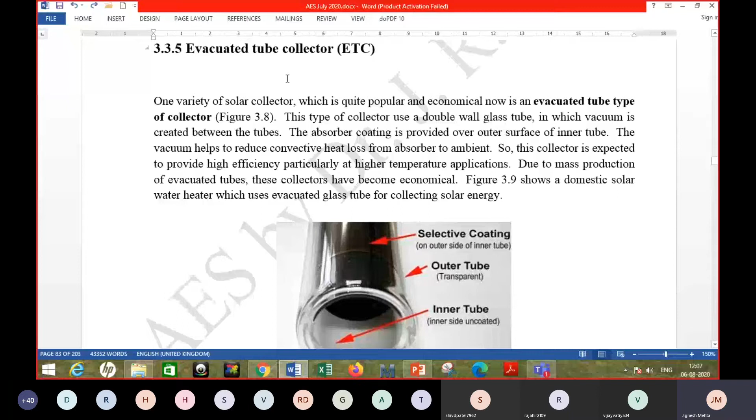The other type of stationary or non-tracking collector mentioned was the evacuated tube collector. Recently this technology has been accepted to a wide extent. One of the reasons given is that it has high efficiency, but the other reason is that the cost is very low because of the mass production of this component, the tube which collects solar energy.

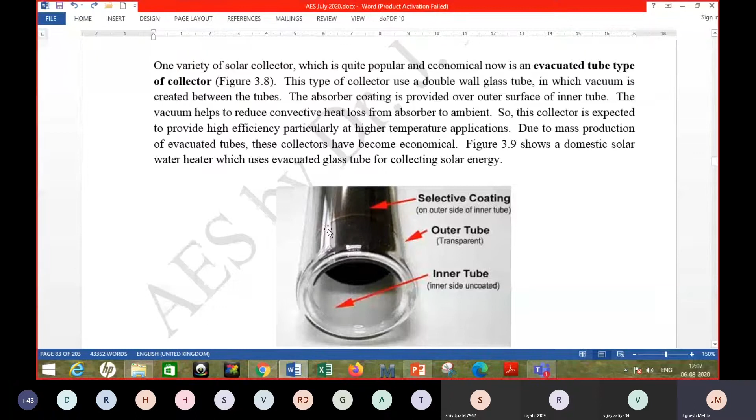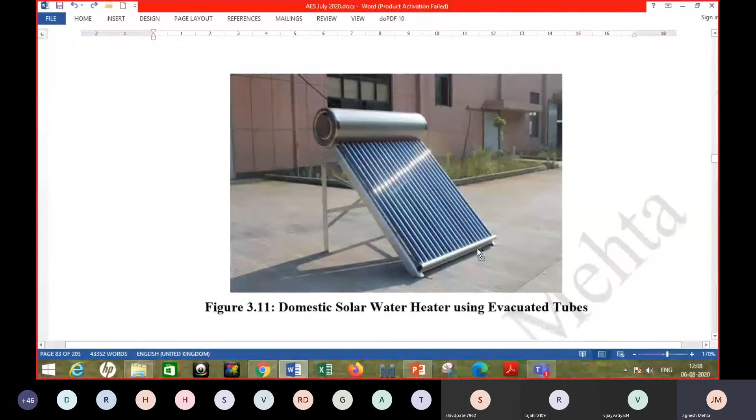Before giving you details about this tube, let me show you something you might have seen. This is another type of domestic solar water heater, which many of you would have seen over terraces of many buildings or houses. One is the flat plate collector, and the other is this one having multiple tubes like this.

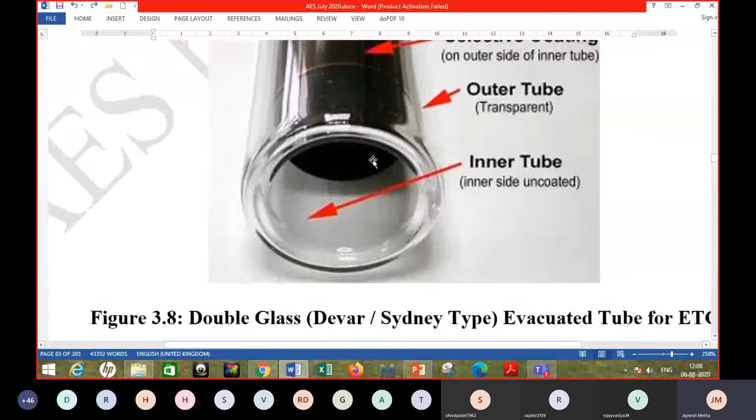So what are these tubes? Individually, though this isn't showing the full picture, it's only showing the mouth portion, which will fit here in the tank. There will be a gasket here so that the water doesn't leak from the joint. That mouth portion is inserted into the water tank, and because of the gasket used at the joint, there won't be any water leakage.

There will be water filled in this tank, which is an SS tank as can be seen here, and there would be insulation, so the heat loss from the heated water would be less. This tube is hollow from inside, and could be somewhere around 1.5 meters long.

This is actually not a single tube. As you can see, there are two tubes, this inner tube and the outer tube. So two concentric tubes are there, with a gap between them, just 2-3 millimeters or so. That gap doesn't have regular atmospheric air at that pressure - it is highly vacuumized. In other words, it is evacuated, and that's why the name evacuated tube collector.

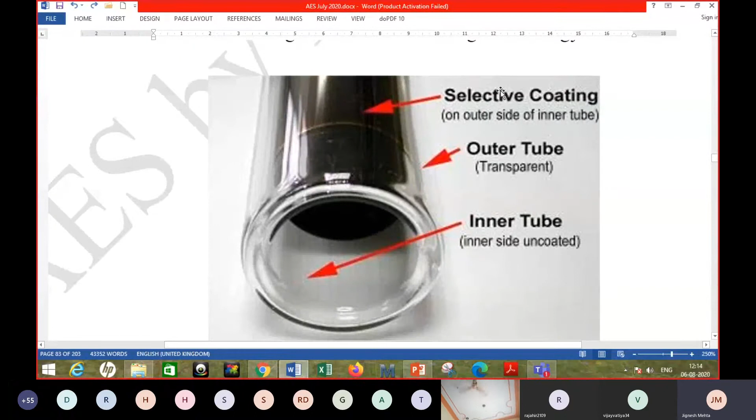But if you operate it at a very high temperature, you can expect that the efficiency could be higher than the efficiency of a flat plate collector. But of course, finally it depends all on the quality of the components used. If the quality of the coating is not very good, its absorptivity itself is not very good, then you cannot expect it will give you higher efficiency.

So another variety, as explained, is the evacuated tube collector.

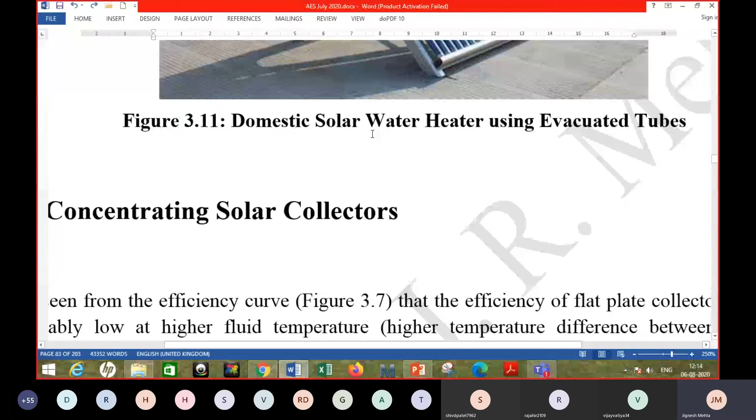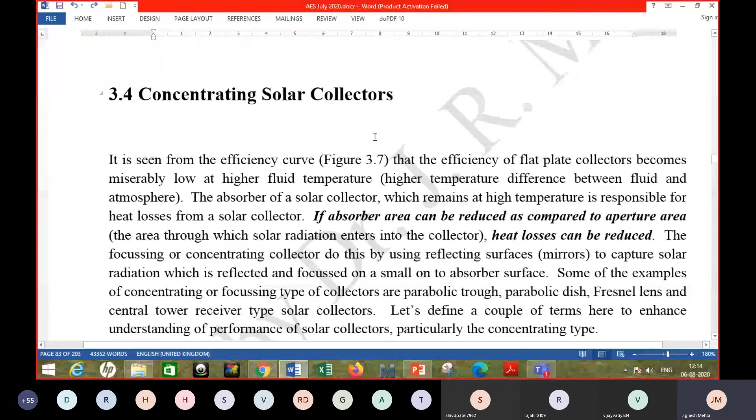Now we are starting to talk about the concentrating type of collector. First question is, why should one use a concentrating type of collector? I can give you some reasons, or disadvantages, or limitations. One, they have to track the sun, almost all of them, except maybe some exceptions. They need a tracking mechanism which has additional cost and maintenance related with that. Again, tracking cannot be perfect most of the times.

So there'll be loss because of that. And when you say concentrating, it means reflection or refraction is involved. So reflection and refraction would have their own inaccuracies, and because of that there could be losses. Also, concentrating collectors can use only beam radiation. They cannot focus diffuse radiation, since diffuse radiation is coming from all directions, so it's not possible to focus them on a small area.

So, but then why do people go for a concentrating type of collector for some applications? The reason is that if you want to produce higher temperatures and you don't want efficiency to go down drastically, then you would go for a concentrating type of collector.

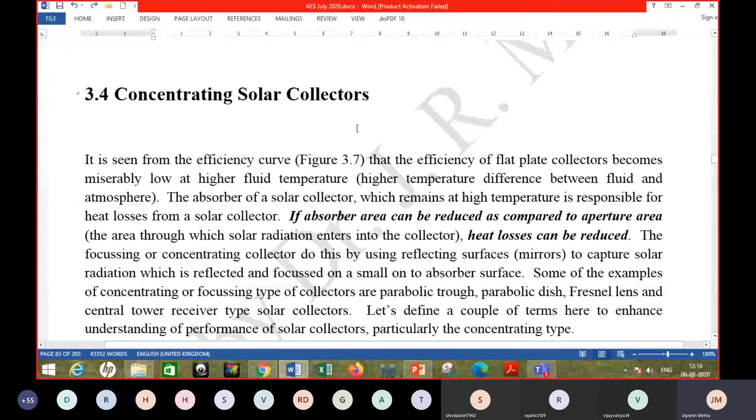So I would show you that efficiency curve again, which is a very important curve. You need to understand that thoroughly. What does it explain? This is delta T. I hope by now you know what delta T is. Delta T is the temperature difference between the inlet fluid temperature and the ambient temperature. Sometimes, as I told, it is taken as the mean temperature of the fluid minus ambient temperature. So basically, it represents the operating temperature.

If you want to produce higher temperatures, different applications need different temperatures, right? For example, water heating, the temperature required is not very high, could be around 60 degrees or so. If you talk about swimming pool application, it will be even lower than that. Other applications, for example producing steam, would need a higher temperature, or process heating applications in different industries, or even refrigeration and air conditioning—you would need higher temperatures. So in that case, your delta T would be higher.

So higher delta T means, for a given collector—let's say this is for a flat plate collector, the simple flat plate collector used for water heating. Now let's say somebody needs water at 50 degrees Celsius. In that case your efficiency value may come out to be, let's say, 70%. But somebody else needs water at 60 degrees Celsius. So in that case your efficiency may come out to be 55%.

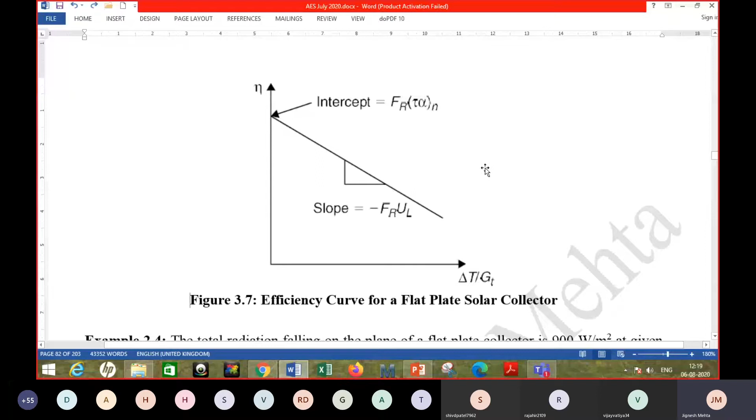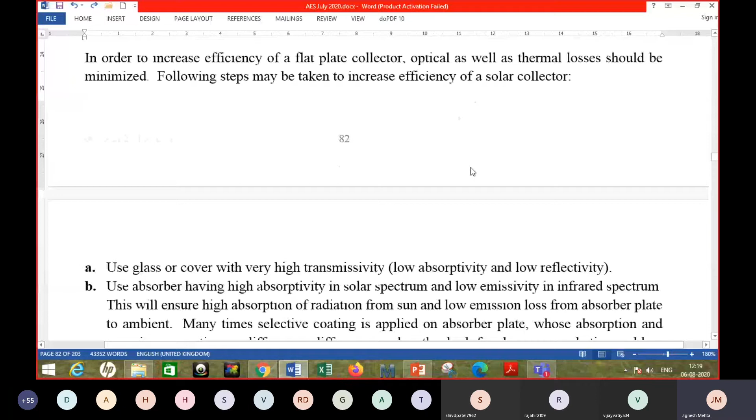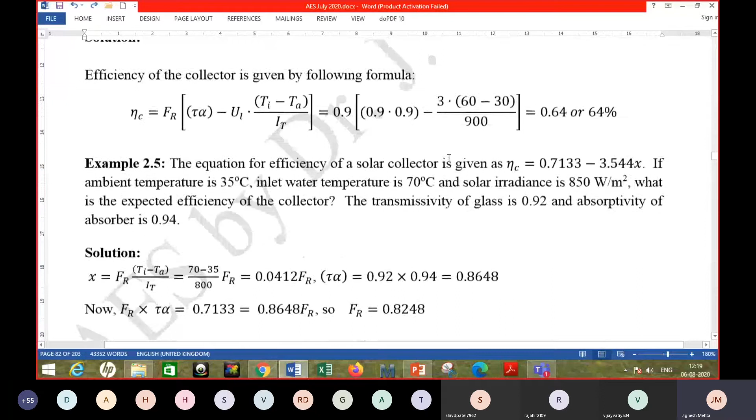So you would rather like to go for some collector which can give you a bit different type of graph, not like this, but having less slope as compared to that. But then sometimes the starting point, this intercept, may be lower, but the slope of the line may be less, and because of that it may be more suitable for higher delta T. So this is the basic concept of why a higher quality solar collector or concentrating type of solar collector may be used. Now, why would the efficiency not reduce drastically with higher temperature in another type of collector? Let me show the graph, I'll explain it there.

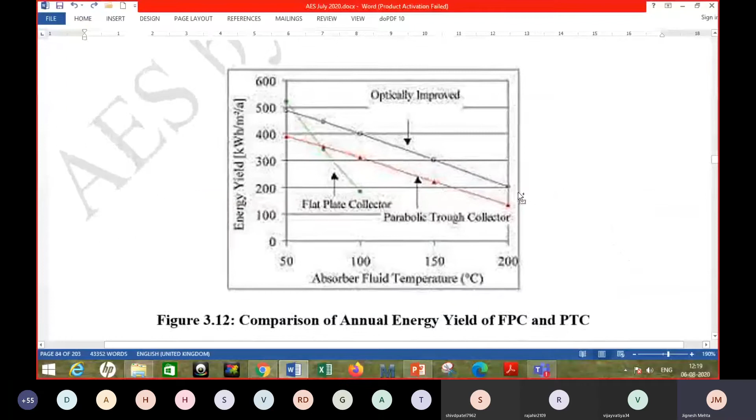Okay, so you have this option. Let's say this flat plate collector. The diagram is not very sharp, but I hope you are able to understand. This line you see here is for flat plate collector. So what does it mean? If you want to go for high operating temperatures, it can give you very low efficiency. It's not exactly efficiency which is put here, but it finally indirectly comes from efficiency. This is energy yield in kilowatt hour per meter square per annum, so the data for the whole year is taken for a flat plate collector.

Of course, how is this line created? It is created with the help of 3 different points. You tested it at 3 different points throughout the year, and from that you are able to generate this data. Now, if you talk about another type of collector, which is a concentrating collector, the parabolic trough type of collector, you might or might not have come across this. That will be explained in this lecture. What is a parabolic trough type of collector?

You can see that the line, the intercept is lower. It means that if you want to use it for very low temperature applications, it is actually not suitable. It's better to go for the flat plate type of collector as compared to the parabolic trough type of collector, which is a concentrating type of collector.

The reasons for this lower efficiency at lower temperatures could be the additional losses in terms of when a reflector is used, so reflectivity won't be 100%. Because of that, the optical loss, which I had talked about in the previous class, could be higher. So that would reduce this intercept.

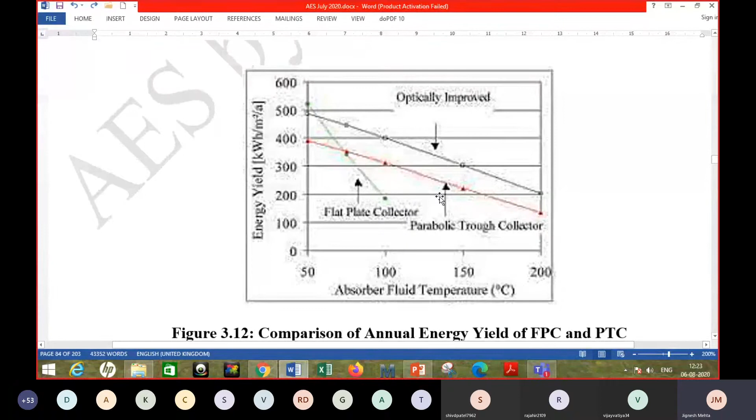Now, what is the reason for that? The reason is, in case of flat plate collector, the aperture area - what is aperture area? It is the area through which the solar radiation enters a collector. Aperture area is almost equal to the absorber area because it is a flat plate type of collector. So that plate area is the absorber area, which is almost the same as the aperture area.

If you consider the glass area equal to aperture area, that plate area is almost equal to the glass area. So absorber area and aperture area are almost the same. Now, what is the problem with high absorber area? The problem is that higher the area, higher the heat transfer rate. Now you know the equation, the heat loss QL is proportionate to the U value, the heat loss coefficient, into area of the collector or rather the absorber, into delta T. So higher the area, higher the loss.

Now, can you keep aperture area the same and reduce absorber area? Yes, that is possible. In case of flat plate collector, the ratio is almost equal to 1. But what you want is to keep your aperture area the same, or higher, and reduce the absorber area. So basically what you want to do is increase the aperture area to absorber area ratio, because absorber area is responsible for heat loss.

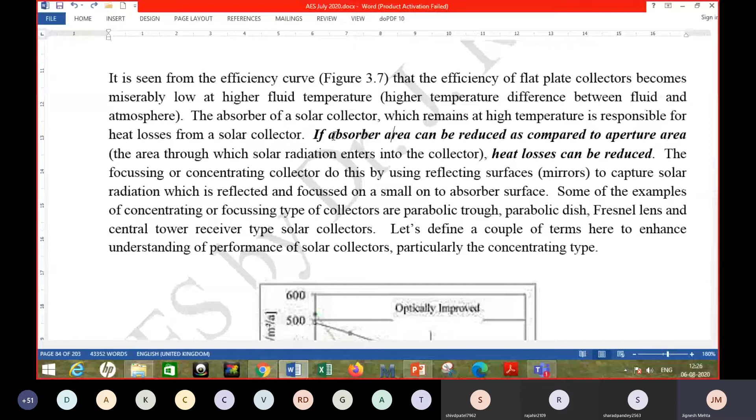The ratio of the aperture area to absorber area is called concentration ratio. If you have a higher concentration ratio, you can expect the heat loss to reduce. Remember, we are not talking about optical losses. Optical losses could actually be higher in a concentrating type of collector, because you're adding more components like reflection or refraction, and geometrical error may be there. So you might be increasing the optical error, but the thermal heat loss would certainly get reduced, because the area through which thermal heat loss occurs can be reduced compared to the aperture area.

So at higher temperatures, it would generally be advantageous to use a concentrating type of collector. Now there is one term, I already defined concentration ratio. There is one term called stagnation temperature.

Now what is that? You have three points for the flat plate collector. I can have even more points, go on increasing the absorber fluid temperature, or just extend this graph assuming it gives a linear curve. So you might find that somewhere near, let's say 140 or 135, this touches the horizontal axis. What does it mean? It won't give you any energy, or efficiency would be equal to zero.

So what does it mean? The absorber fluid temperature is 135. So what does it mean? It will give no output if you try to get heat at 135°C. Why would that happen? It would happen because the absorber surface is so heated, it is at such a high temperature that the heat loss equals whatever gain there is from solar radiation conversion.

The gain is lost to the atmosphere because the temperature is so high, and you are not able to heat the fluid at all. It just remains, you are pumping it in at 135, it comes out at 135. That's all. You are not able to get any productive output from that collector.

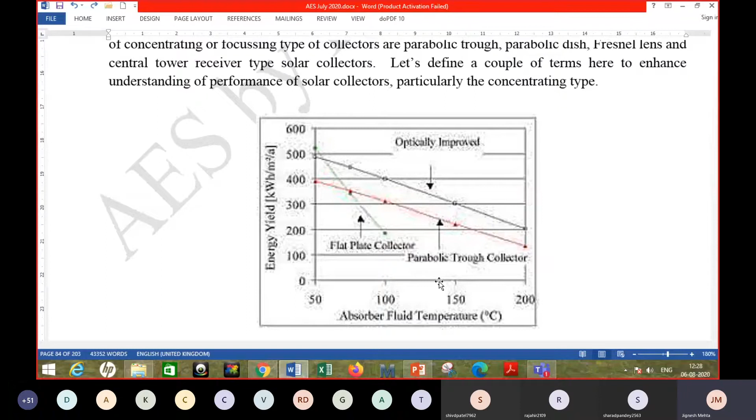Now this temperature is called stagnation temperature. Higher the concentration ratio, higher the stagnation temperature. As you can see, for a parabolic trough type collector, it is much more than 200°C. So even up to 200, let's say it touches 250. So if your fluid temperature is below that it will certainly give some output, but at 250 it will not give you any output.

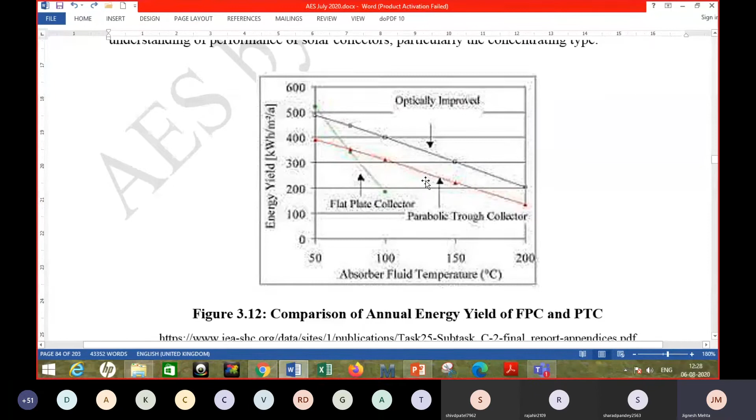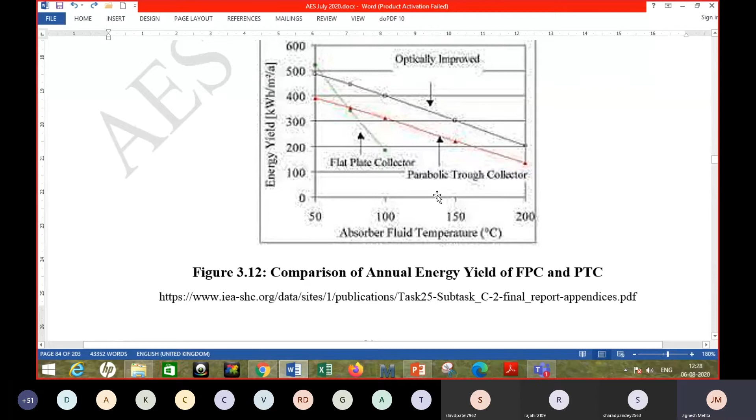This stagnation temperature is important because in case the collector is lying idle, it should still be able to withstand that temperature, the stagnation temperature. Because there could be times when you are not using the collector for some reason, and the collector will reach a very high temperature equal to the stagnation temperature. So your collector design should be such that it is able to withstand the stagnation temperature. Okay, so that is about the stagnation temperature.

Concentration ratio is the ratio of aperture area to absorber area in case of a concentrating collector. So what is a concentrating or focusing type of collector? It will have some area which reflects or refracts solar radiation and focuses it on a smaller absorber area. All those types of collectors are concentrating type collectors.

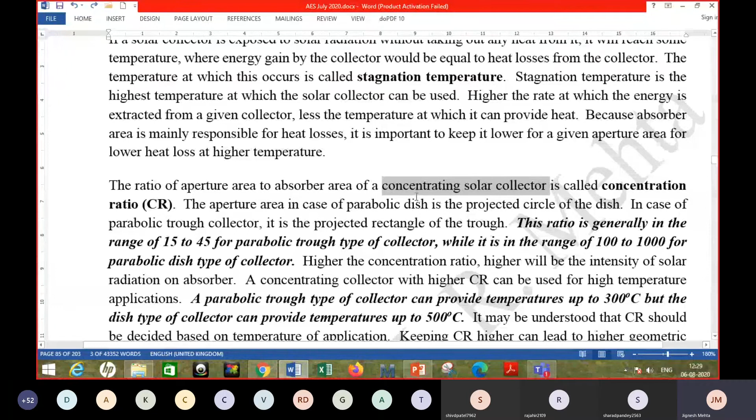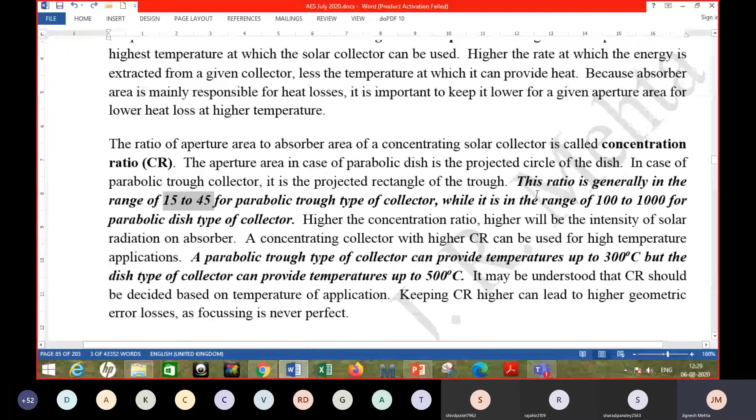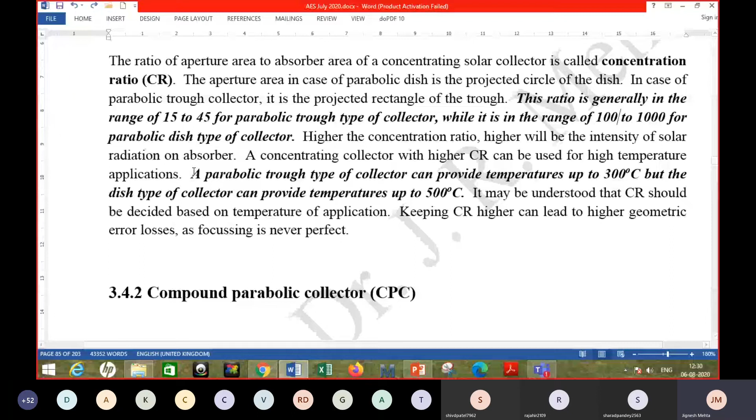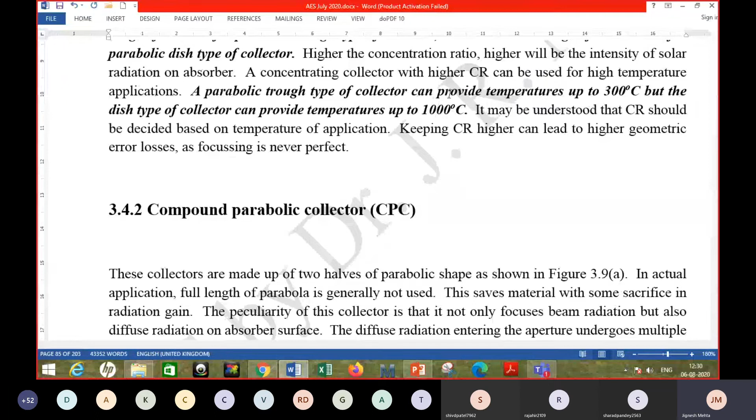There is a parabolic trough type collector which has this concentration ratio, CR, generally in the range of 15 to 45. But there are other designs like the parabolic dish type collector, which has a concentration ratio in the range of 100 to 1000. Generally, higher the temperature you want, higher the concentration ratio you keep, because you want to reduce the absorber area compared to the aperture area to reduce thermal losses. A parabolic trough type collector can provide temperatures up to 300, but a dish type collector can go up to 1000°C.

Let's talk about one type of collector called the compound parabolic collector, which has become more popular, or is recommended for applications where the required temperatures are not very high, somewhere around 120 to 150°C. This is actually a concentrating type of collector, but the concentration ratio is small, generally less than 3. It is said to be a non-imaging type of collector, which is one of the advantages stated for this type of collector.

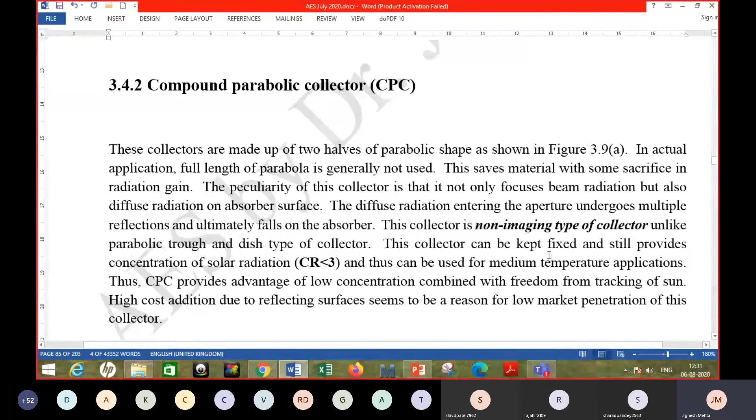So I'll show you the figure of this collector. It's generally for medium temperature applications, not very high temperature application. So theoretically, it is made like this.

So you have one parabola A here, this dashed line, but this portion is shown as full line. There is one parabola here, A, and another parabola here, B, and again some portion of that is shown as dark.

Now what is done is you are not using two full parabolas. What you are using is only this part of parabola B, and only this part of parabola A.

Now here, this is the aperture, you can see. The radiation would enter from this area, and because this is parabola B, once it is reflected, it will fall on the focus of parabola B. So this is the focus of parabola B, and this is the focus of parabola A.

So you are going to keep your absorber plate, maybe at the bottom here or maybe slightly up here. So whatever radiation strikes this darkened portion or this darkened portion is going to fall on the absorber area, which will be kept somewhere here.

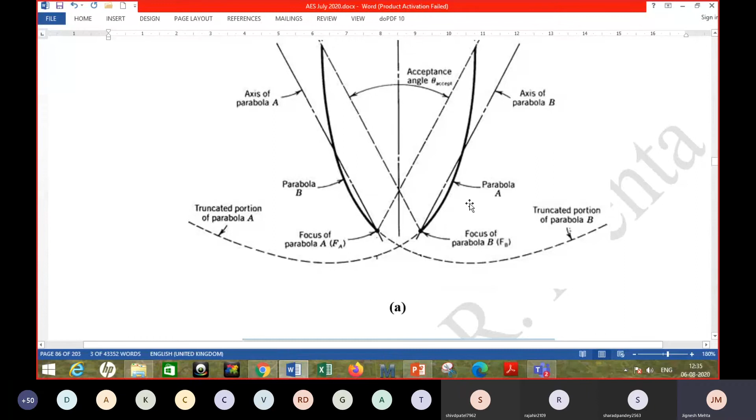CPC, compound parabolic trough type of collector. This collector is generally used as a non-tracking type of collector. It is kept stationary. If concentration ratio is low, what you sacrifice by not tracking the sun is less, or for a few hours you can expect that

all radiation which is entering into the collector will still fall on the absorber. So that is what is called acceptance angle. Higher the concentration ratio, less the acceptance angle, and you have to track the sun more perfectly.

Now, because here CR is less, you may not at all track the sun. So what I was talking about, these lower portions are used, and then you put the receiver here as shown in a CPC. So this is a CPC, compound parabolic

collector, which can also be used for medium temperature applications, somewhere around 120 to 150 or so. So this may still be used as a stationary collector.

So there is a video which I'll play now, and you can watch that video. It shows and talks about the application of this type of collector for process heating applications.

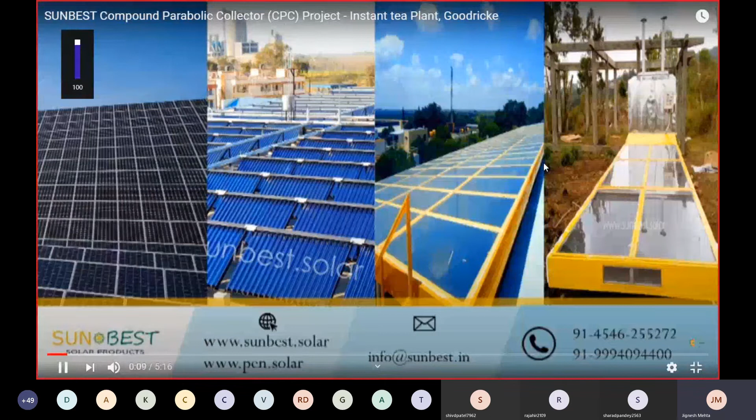This project is located in the Jalpaiguri district of West Bengal, where Goodricke Group has their instant tea plant inside one of their flagship gardens, Aibheel Tea Garden. This is the view of Aibheel Tea Garden. Instant tea plant is a 100% export-oriented unit, producing instant tea which requires on average 5,000 liters of water per hour, and this water needs to be heated up to 80 degrees centigrade. Heating is taken care of by steam, generated by burning coal. This is the view of the instant tea plant from the front.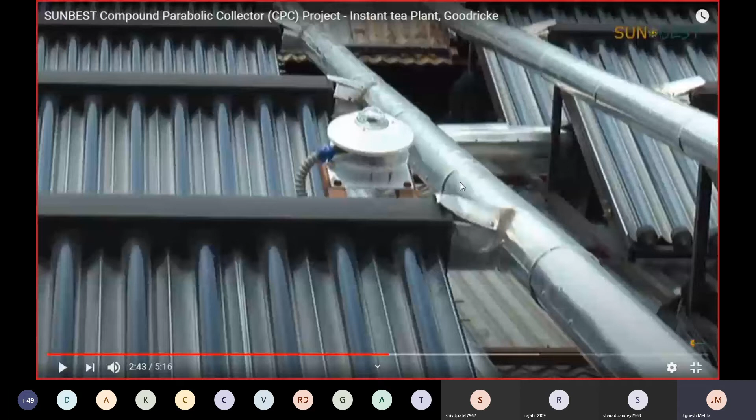You can see the pyranometer installed? The way it was shown, it is kept on the plane of the collector. This will give you the total amount of radiation or irradiance falling on this inclined surface. You don't need to do any calculation. Whatever is measured by this pyranometer is the input energy, and that's how you can find the efficiency of the collector.

That is, what is the pumping, what is the water flow rate, multiplied by Cp of water into the temperature change of water - that is the output energy. Divided by the input energy in watts per meter square, multiplied by whatever is the area of the collector, gives you the efficiency.

And you can see that an evacuated tube is actually used here as the absorber tube, right? So the water will be pumped through that.

Now water will be pumped through that, and as you can see, this will not have water completely filled in the tube. Here there can be a U-tube which is inserted, and there would be fins inside this tube which will take heat from the inner surface of the tube and give it to the water flowing in the tube, and that will finally be collected in the manifold.

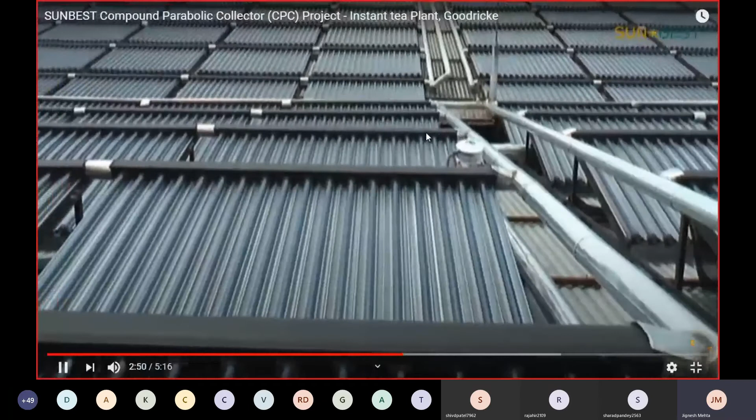Water passes through a PHE, or plate heat exchanger, where it transfers the heat to the cold water and once again goes back to the CPC collectors, where it gets heated up once again and gives up its heat energy while passing through the PHE.

As mentioned, the water which is circulating in the tubes is different from the water which will be used in the plant, and it's called PHE, that is plate heat exchanger. You will again come across this when you study the subject of heat and mass transfer. This type of heat exchanger is used to exchange heat with water that will be used in some process heating.

It's a closed loop, so the same water is recirculated. The inlet water temperature will not be ambient temperature - it could be 5-10 degrees less than the outlet water temperature. This cycle carries on as long as the sunlight remains.

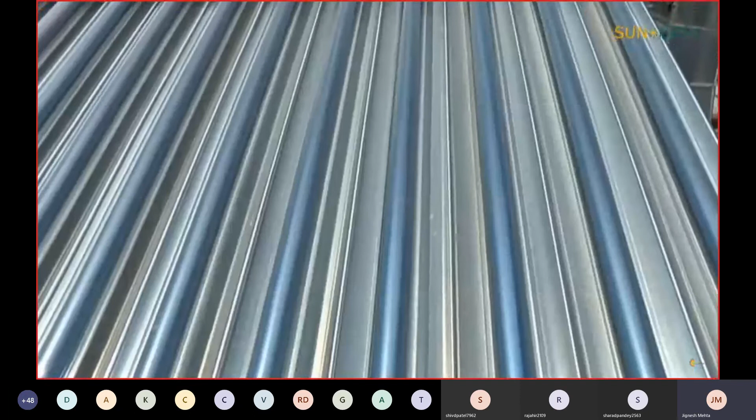To extract maximum benefit out of the solar collectors, two actuator valves were installed, which is basically a PID controller. It senses the input water temperature and releases only that much amount of steam which is required to increase the temperature to 80 degrees centigrade.

So he mentioned about some control, because you want the water to come out only at 80 degrees Celsius. So you're reducing the flow rate in case less solar energy is available, during not so sunny days or cloudy days.

These tubes that you see here are called headers. They carry the water tubes, the incoming water and the outgoing water. As you can see, it is insulated because you don't want to lose the heat of that water into the atmosphere. So it is insulated, and then there is cladding, covered with metal sheet. That is called cladding. And then it is carried to the plant.

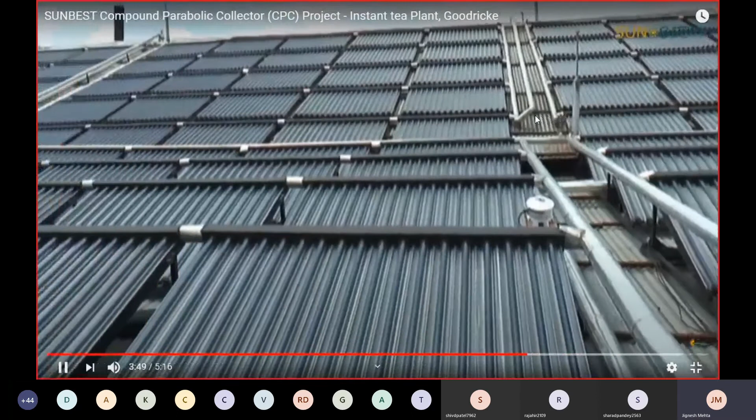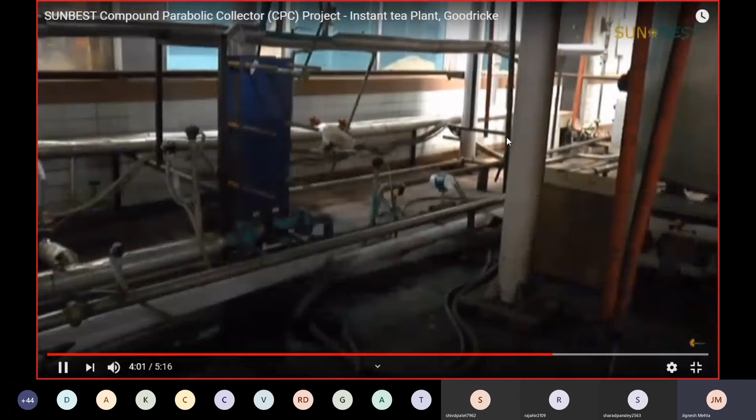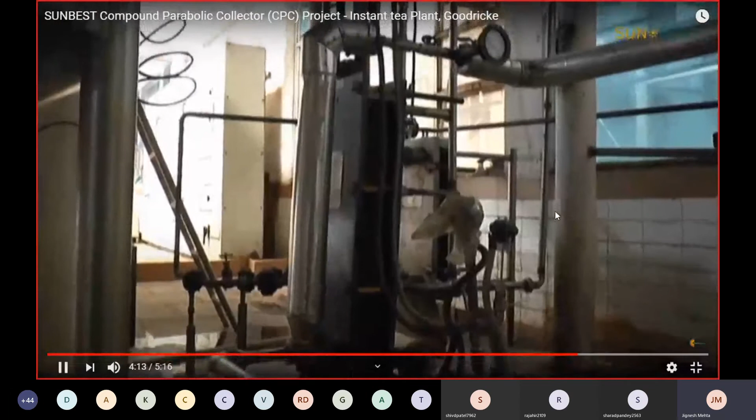This is the inside view where heat exchange is taking place through the solar PHEs. These are the pumps which circulate hot water through the PHE. This is number 1 solar PHE, or plate heat exchanger, and this is number 2 plate heat exchanger. This is the view of the actuator valve.

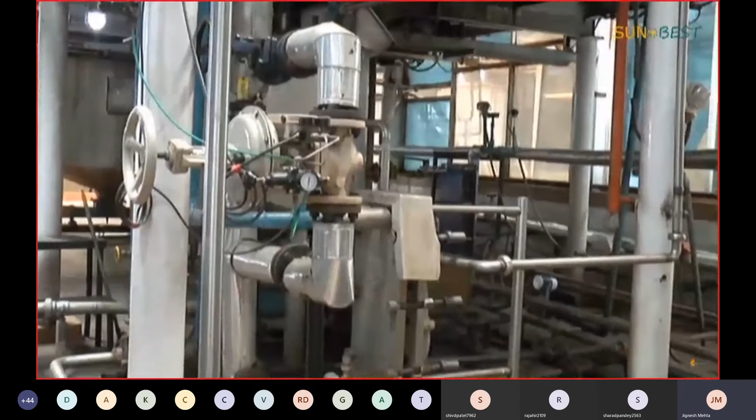With the installation of CPC collectors, on an average per day, around 600 kg of coal savings was recorded.

It must be a counterflow type of heat exchanger. That is 91 degrees centigrade, and the processed water which is going inside the plant is 87 degrees centigrade.

I hope this gave you some good idea about the parabolic, this CPC, compound parabolic trough type of collector. These are the reflecting surfaces which give you some additional concentration, and because of that you are able to get somewhat higher temperature or higher efficiency at somewhat elevated temperature. Though he mentioned the temperature equal to 80 degrees Celsius, you could see that if it is a sunny day, you can expect even higher temperatures. So 91 was seen on the panel. This type of design, which has somewhat higher concentration, can give you this, which is like higher than 1. So CPC, as I mentioned, it is less than 3 most of the times.

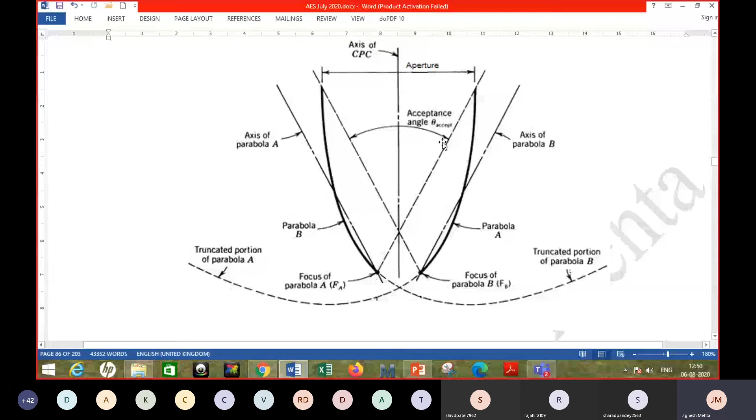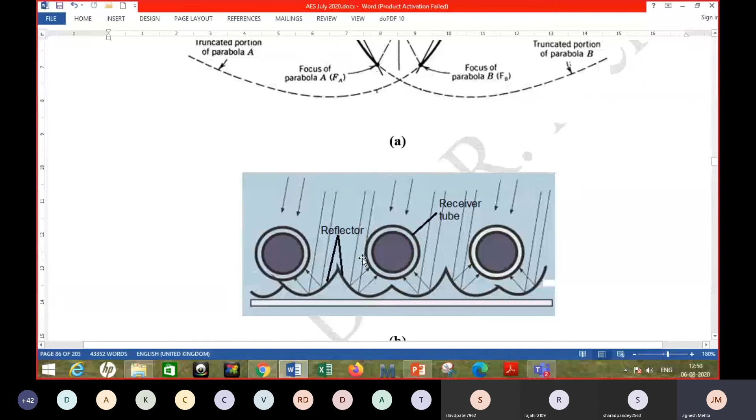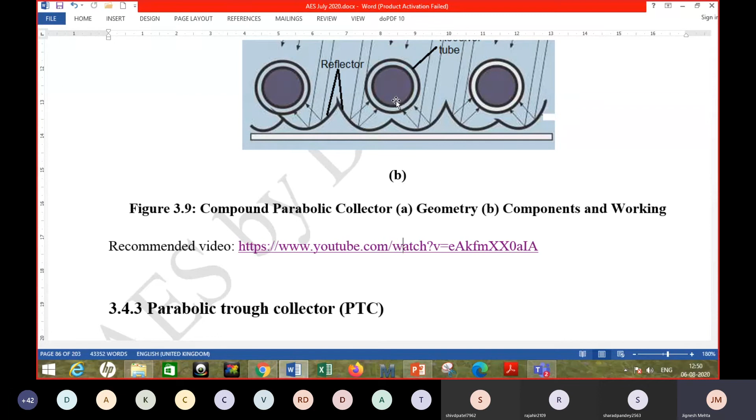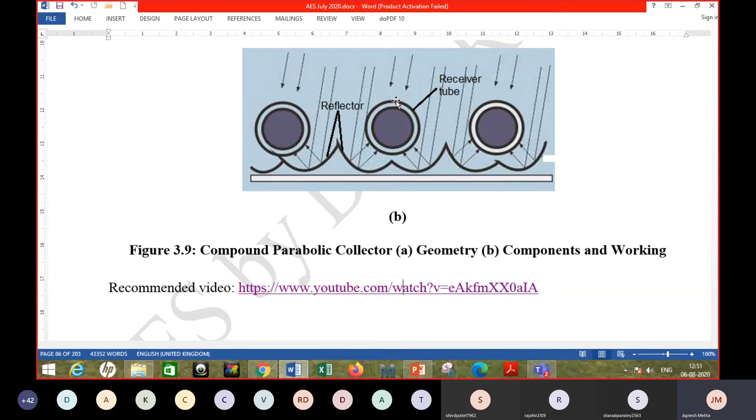But it was a fixed collector, as you could see. There is no need for tracking, even though there is some concentration or focusing of solar rays done, because the concentration ratio is low. So like in this case, the acceptance angle is high. Only a couple of hours at the time of sunrise and a couple of hours at the time of sunset, you may lose a very high portion of the solar radiation because it may not be focused properly. But the rest of the time it is able to focus it nicely on this receiver area, where evacuated tubes are put, and you are able to get output from that. Also, for environmental aspects, you are able to reduce the consumption of fossil fuel or coal, and you are reducing carbon emissions.

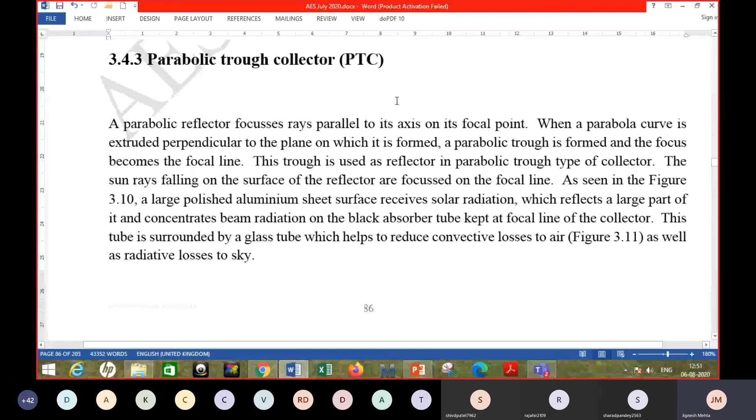So in addition to economics, the environmental aspects should also be considered when talking about alternative or non-conventional renewable energy sources. The other type of collector, which is also very popular, is the parabolic trough type of collector. Let us see the design of this type of collector. A small parabolic trough type of collector has been shown here. Now we are talking about the focusing type of collector. So from now on, whatever collector we talk about, they will all try to track the sun, having some kind of movement so that it is able to keep that cos theta angle, or theta angle, as low as possible.

You can see this highly polished reflector sheet, which gives you high reflectivity, could be highly polished aluminum sheet. Whatever solar radiation, the beam radiation, falls on this. Now we are talking about only beam radiation, since the diffuse part cannot be used. Whatever beam radiation falls on the reflector sheet is reflected. Of course, reflectivity cannot be 100%, it can be 80%, 85%, maybe 90%. So that much percentage is reflected, and the rest is absorbed. The reflected portion, if the geometry is perfect, will all fall on this tube. If the geometry is not perfect, then some part may miss this absorber tube.

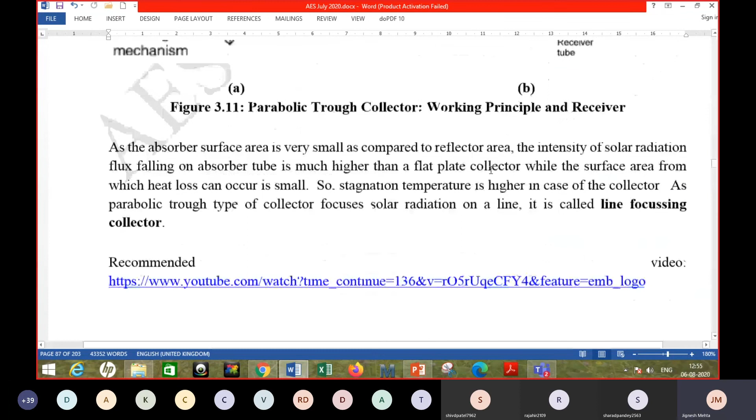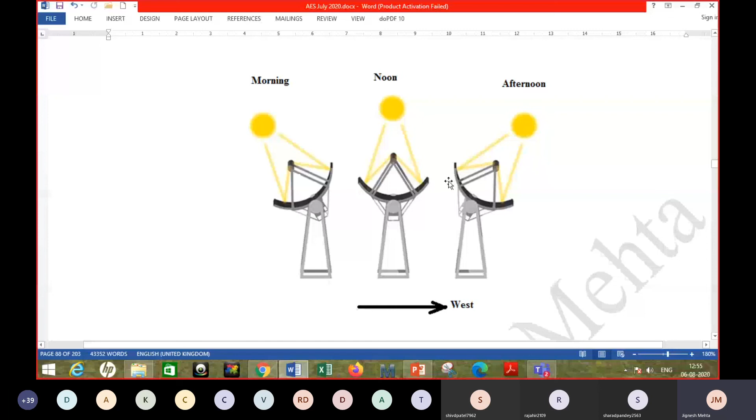The tracking methodology I just described would keep this axis in the north-south direction, and the tracking would be east-west tracking, as shown here. The details of the components are shown here. Now you cannot see the axis, it is a point - that line perpendicular to the page would be the north-south line. There is east on the left side and west on the right side. In the morning it will be facing east, this is noon time, and this is afternoon. So this is how the daily tracking may be done. There are different tracking methodologies, but this is one of the most popular. So this is single axis tracking.

This type of collector is actually a line focusing type of collector. It focuses the solar radiation on a line. Ideally it focuses on a line, and on that line you are putting this absorber tube, a small diameter absorber tube. So all reflected radiation are supposed to fall on that line.

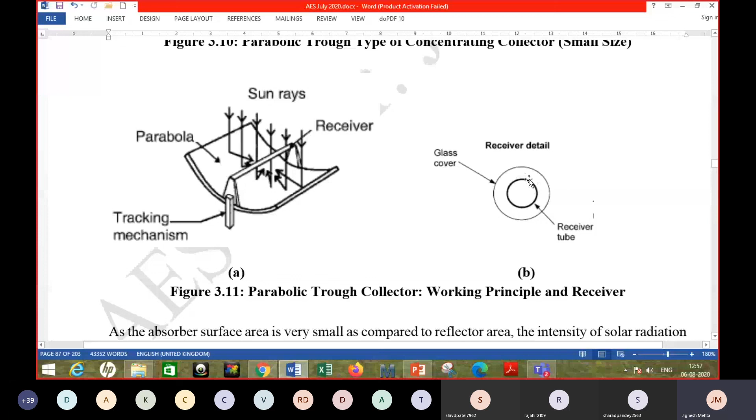On the right hand side you can see the receiver details. What you could see there was just a black coated tube. Many times a glass cover is also put, and one of the reasons is it would reduce convection losses, and it will also become a barrier to radiation losses. Of course, when you put a glass cover, glass doesn't have 100% transmissivity, so there will be some transmission losses in addition to the reflection losses from the reflector surface. So you are increasing optical losses, but by putting glass you will reduce thermal losses. So finally, you have to decide what temperature you need, and for that, whether I need to put the glass or not. Another reason could be to protect the tube from weather conditions, so for that also you might need a glass cover.

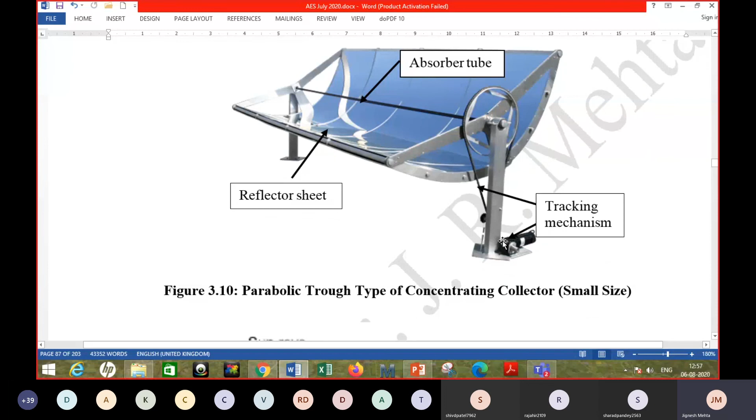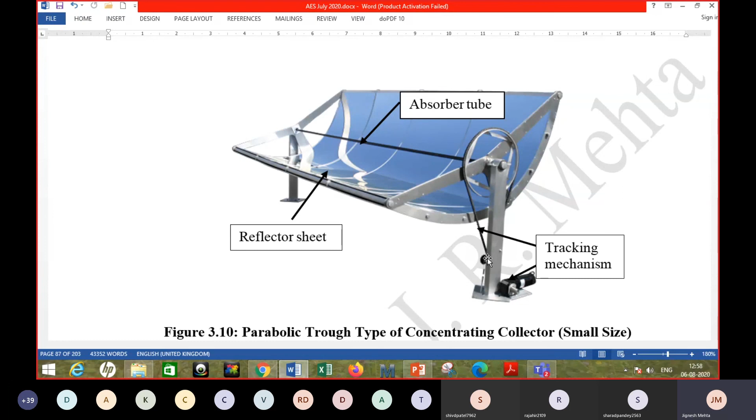So these are the different components - this is the tracking mechanism. It could be a constant movement in this case also, because it moves according to the movement of the sun. So single axis tracking mechanism could be used here, and it can be automated. Most of the time it needs to be automated because you can't do it manually. Manually, if you want to do it, then every hour or couple of hours you have to move it facing the sun, but it will not be perfect tracking. Of course, single axis tracking is again not perfect tracking, but you lose little radiation - if you try to make it perfect tracking, then it will complicate things more.

So I'll stop here for today's lecture. The video for a parabolic trough type of collector would be shown in the next lecture. That is where we will start in the next lecture. Yeah, so I hope all of you have...